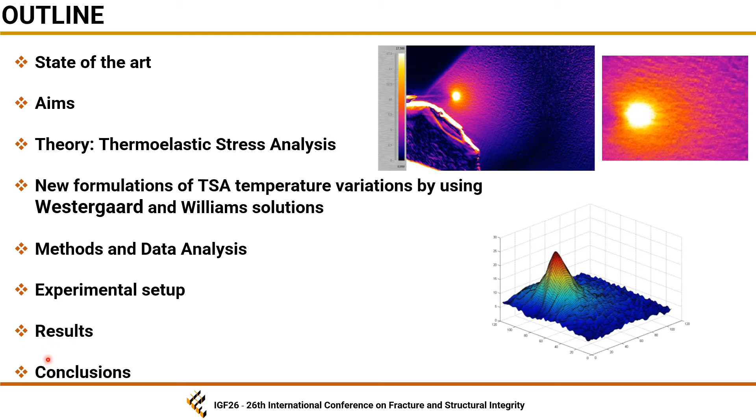Stress intensity factor is used for describing the stress state and then the mechanical behavior of the material in presence of cracks, and it can be experimentally assessed using contactless techniques such as the thermoelastic stress analysis technique. Stanley presented, for example, a procedure based on the Westergaard equation for the elastic plane stress condition. In this case, the stress intensity factor can be obtained by relating the first stress invariant and the crack tip position, and the main advantage

is that only a series of signal profiles, in this case horizontal signal profiles scanning around the crack tip stress field and away from the plastic zone, are required to obtain the stress intensity factor measurement. The main drawback of the approach refers to the neglect of the T-stress term in the Westergaard equation, which led to an error in SIF evaluation.

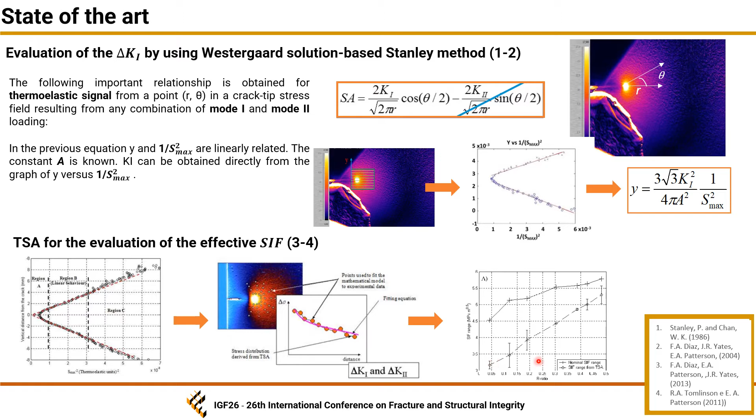And on the other side, instead of using a linear interpolation method, the over-deterministic least squares fitting method can be used for a more accurate estimation of the stress intensity factor, in this case by using a Williams series expansion. In this work, the approach has been used for assessing the effective stress intensity factor from thermoelastic maps.

Even in the work of Pitarresi et al., an over-deterministic least squares fitting method using the Williams series expansion is adopted. In this case, T-stress was considered in the analysis, and the stress intensity factor was determined as a function also of the number of terms in the Williams series function, and the extent and position of the area for data input were also assessed in this work.

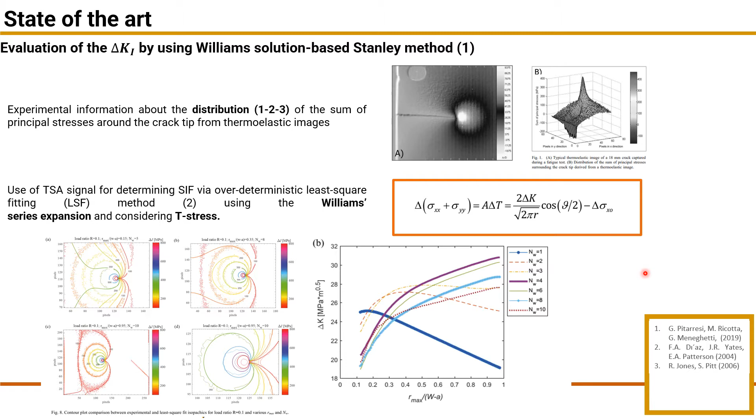All these works are based on the classical theory of TSA, in which temperature changes are related to the stress change through the thermoelastic constant for an isotropic material under linear elastic and local adiabatic conditions. But this classic approach is only valid if the change in the mechanical properties of the material with temperature can be considered negligible. Moreover, depending on the material, the problem of the mean stress influence was also not addressed.

That's why we're dealing with this issue, the issue of considering the second order effect in the thermoelastic signal formulation. And in fact, the aim of the present work is to show a new formulation that includes the mean stress dependence to investigate the thermoelastic effect in the proximity of crack tips for titanium, and also to show the differences in SIF evaluation with and without taking into account the mean stress dependence in the thermoelastic formulation.

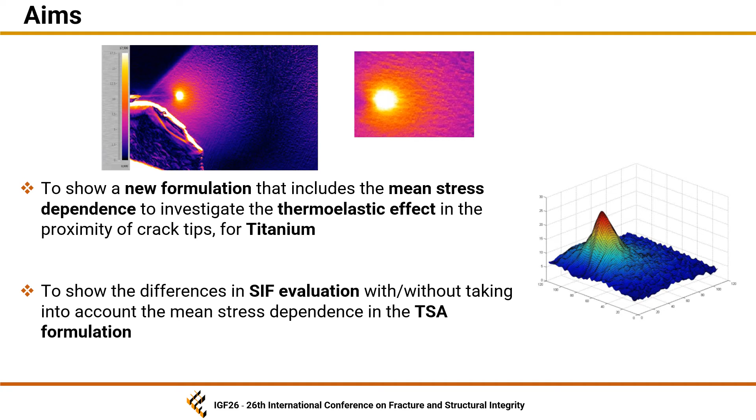Thermoelastic effect relates the temperature change with the change in the sum of principal stresses for an isotropic material under linear elastic and adiabatic conditions. The thermoelastic equation was derived by imposing the conservation laws which govern the mechanics of small quasi-static deformation and the second law of thermodynamics. And we can see the time derivative of the temperature in function of the first stress invariant and the principal stress,

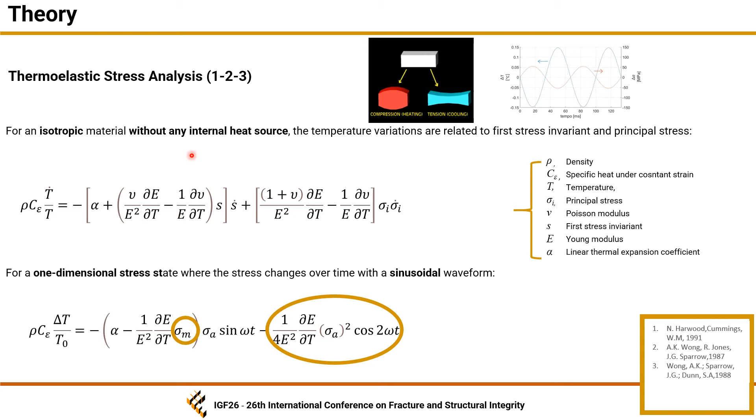and by also considering a one-dimensional stress state where the stress changes over time with a sinusoidal waveform, we can see that there is a mean stress dependence that arises when the material mechanical properties such as Young's modulus depend on temperature, and it is also interesting to observe another term running at twice the mechanical frequency.

By considering the previous formulation and taking into account the material constants, the principal stress, and by considering that the principal stress under generic sinusoidal loading can be written in function of its amplitude and loading ratio, it is possible to obtain this wide expression for the time derivative temperature variation, the thermoelastic temperature variation in function of the material constants A and B, Poisson ratio, and the amplitude of the principal stress in direction 1 and direction 2.

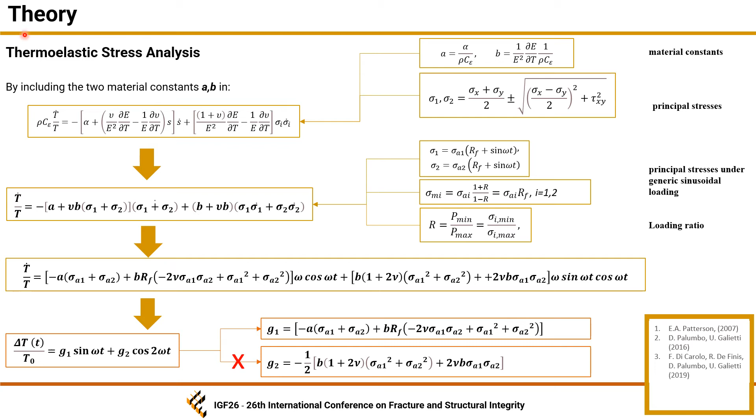And this equation in a more compact form represents the general expression of the thermoelastic signal in proximity of the crack under the hypothesis that these temperature changes are very small compared to the environmental temperature. In the present work, we will focus on this term that represents the amplitude of the thermoelastic signal in order to investigate the effect of the mean stress and also to understand how the second order terms change the thermoelastic equation in proximity of the crack in the new formulation.

So, by considering the Westergaard solution, where we consider the presence of T stress, this term, and by coupling this equation in the general expression of the thermoelastic signal as previously seen, we can see the new formulation if we consider that the B constant is different from 0, and in case we have B equal to 0, we have the classical solution used for relating the thermoelastic signal and stress intensity factor.

And this one is the new formulation where we can see that the temperature variation depends also on the stress ratio and the material constant B and the Poisson ratio. In this case, here we have the Williams solution, series expansion truncated to the third term, that is combined with the TSA second order equation to obtain the new formulation.

The thermoelastic temperature variation clearly, even in this case, depends on the stress ratio and depends also on the Poisson ratio and the B term that is different from 0. And we have also the classical solution for relating the thermoelastic signal without considering the mean stress effect. Here, this temperature from the classical solution and this other from the new formulation are used to obtain the synthetic, corrected and non-corrected thermoelastic temperature variation that will be compared with measured thermoelastic data.

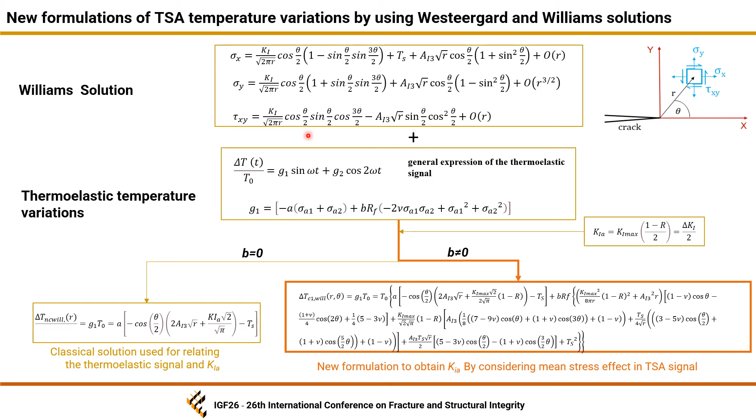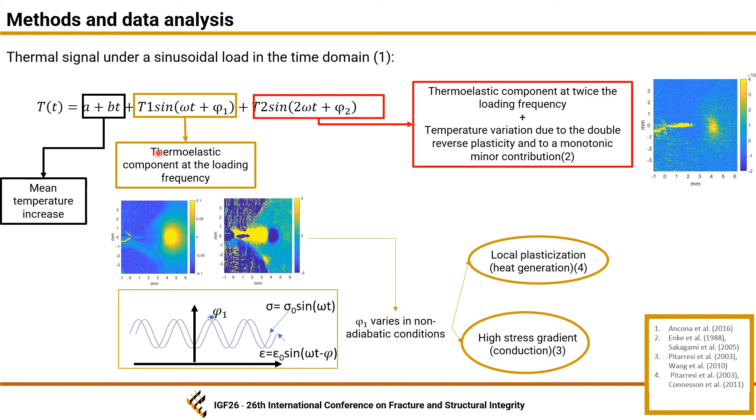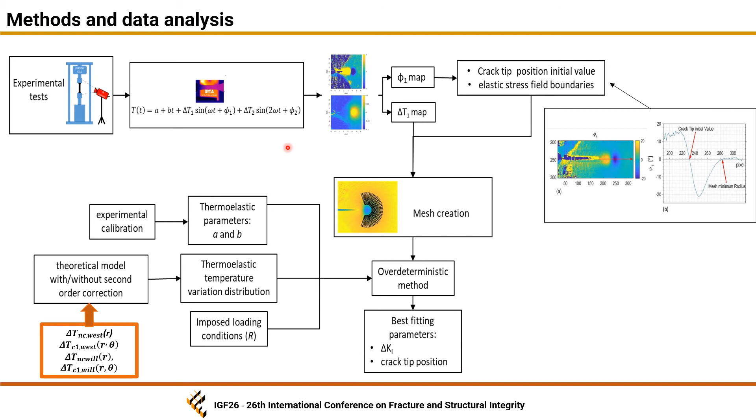The over-deterministic methods led to obtain the best fitting parameters, that are the stress intensity factor for Westergaard and the three coefficients considered, the stress intensity factor, T stress, and constant A for Williams, and it also led to obtain the crack tip position.

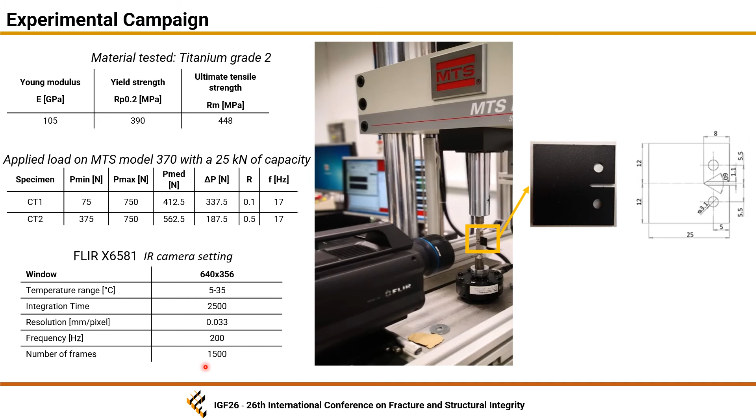The test material was a titanium grade 2 small scale compact tension sample tested at an MTS loading frame with a 25 kilonewton capacity. The loading condition involved a stress ratio of 0.1 and 0.5. The thermal acquisitions were carried out by using a FLIR X6581 infrared camera that acquired 1500 frames at 200 Hz.

In order to assess the thermoelastic constant, a calibration was carried out. The calibration involved the following steps. Firstly, the acquisition with infrared camera of the thermoelastic signal during a sinusoidal loading test on dog bone samples at different levels of mean load. Secondly, the lock-in analysis and calculation of the first harmonic amplitude and reference temperature T0, and finally evaluation of the thermoelastic parameters A and B by just fitting the experimental data, and we can see the value of this material constant here reported.

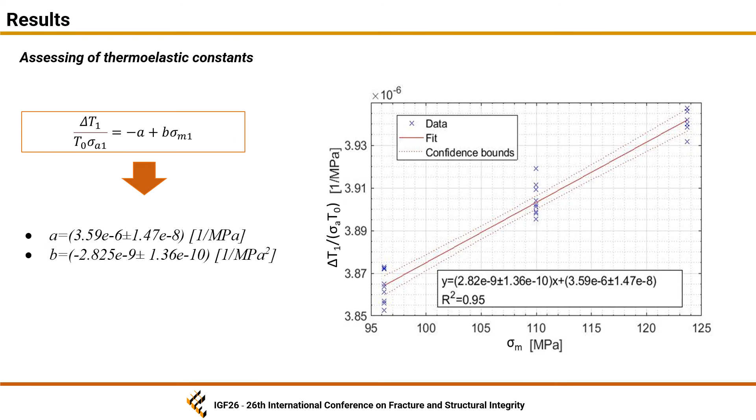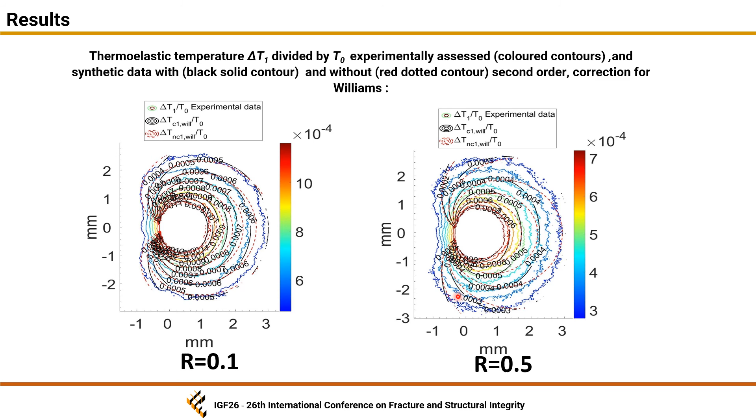Even in this case, referring to these isopachics of experimental data and synthetic data obtained by using the Williams series expansion, we can see that the new formulation, represented by the black solid contour, that takes into account the mean stress effect, approximates very well the experimental data, and the same consideration can also be drawn for the 0.5 stress ratio.

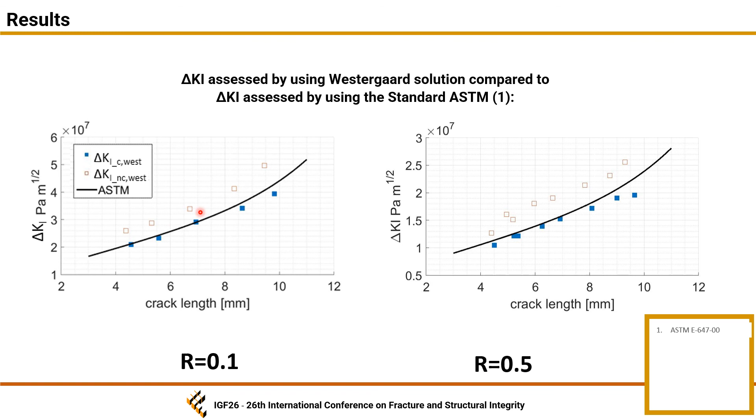In order to make more consistent considerations, in the following graph we can see the stress intensity factor assessed by using the Westergaard solution and the new formulation, and the Westergaard solution for the classic formulation, compared for both stress ratios to the stress intensity factor evaluated according to the standard. We can see that there is a great agreement between the data from the new formulation and those provided by the standard, with respect to the stress intensity factor assessed by classical theory not accounting for the mean stress effect.

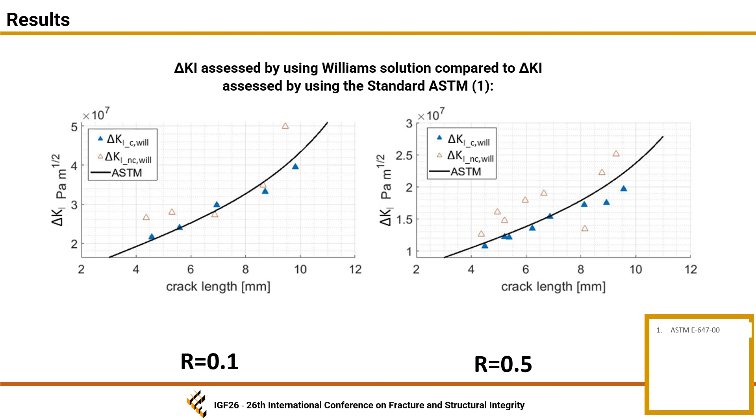Finally, in this presentation, we propose a new formulation to account for the mean stress effect in proximity of the crack tip on materials such as titanium and aluminium. The proposed equation can be a useful tool to understand the limit of applicability of classic theory and well-known solutions and the error made in neglecting the second order effect.